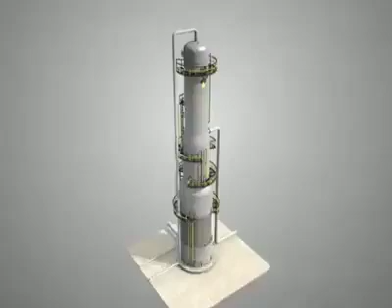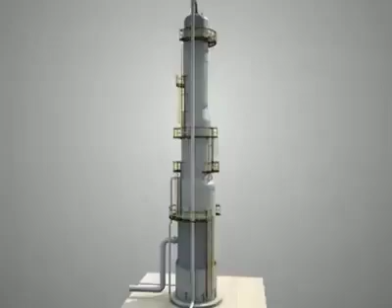In distillation, difference in volatilities is used in the separation of two or more components from their miscible mixtures. The term relative volatility is worked out from experiments and available as vapor-liquid equilibrium data. Higher the relative volatility, easier will be the separation of two components from their mixture using the distillation process, and vice versa.

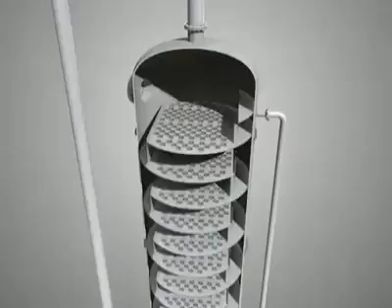Fluid nature, operational requirements, economics, etc. affect the selection of type of distillation column internals, namely packing or trays. These internals are provided to ensure proper contact of uprising vapors and downflowing liquids.

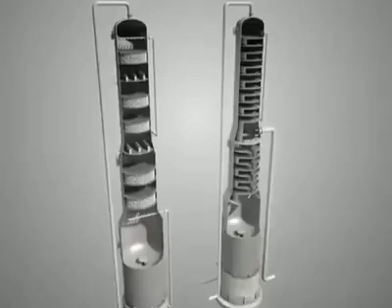The overall distillation system contains various components like feed preheater, distillation column, condenser, reboiler, etc. Knowledge of the complete distillation system along with column internals is required to design and operate it more efficiently. Distillation is a process for the separation of two or more components of desired composition from their miscible liquid mixtures.

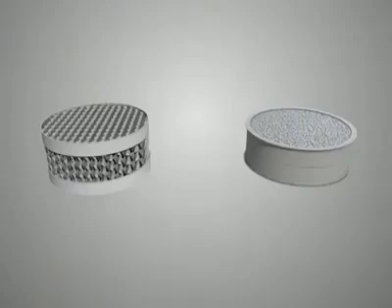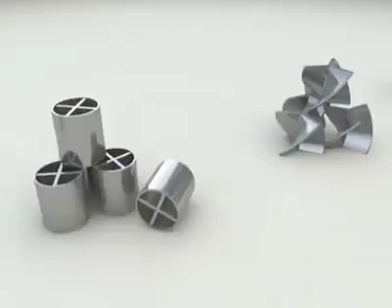Like every separation technique which uses the difference in properties of two components, e.g. density difference used in liquid-solid separation from their slurry by gravity settling method, difference in volatility of two components is used for their separation using the distillation method.

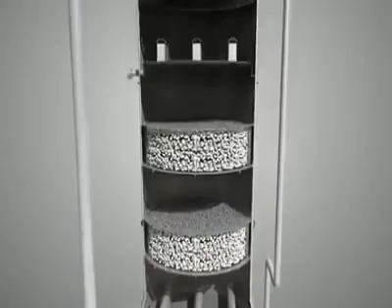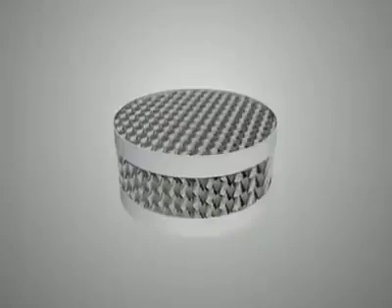Though vapors generated are enriched with high volatile components, trays are relatively complex distillation internals from a design and hydraulic standpoint, which consist of a tray deck, downcomer, and outlet weir.

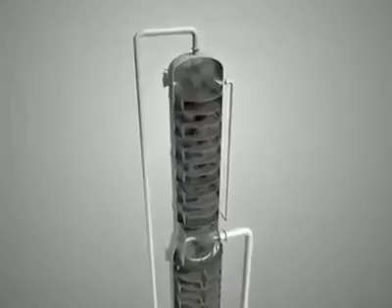In the operation of a typical cross-flow tray, liquid enters the tray at one side and flows across the tray toward a downcomer at the opposite side of the tray (Bruckert, 1968). As the liquid flows across the tray, vapor passing through the perforations in the tray surface forms a froth on the tray surface, which allows mass transfer to take place.

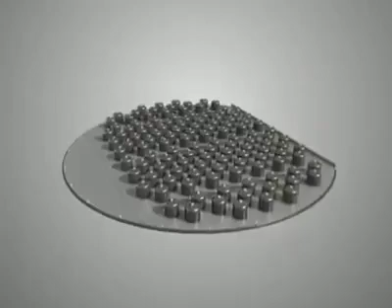At the outlet from the tray, the froth spills over a weir subtending the tray into the downcomer. The downcomer is a device for transferring the liquid phase downward to the next successive tray, but is sealed by such liquid against the vapor passage upward.

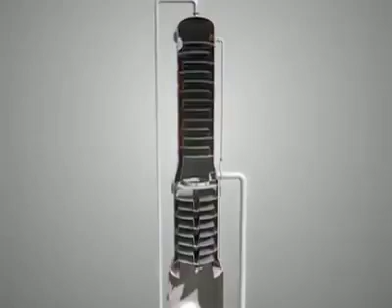In the downcomer, the vapor separates from the froth, leaving a pool of disengaged liquid in the downcomer below the level of the active tray surface. The disengaged liquid enters the next tray under the force of its hydrostatic head, independently of the forces that create the froth and move the froth across the tray.

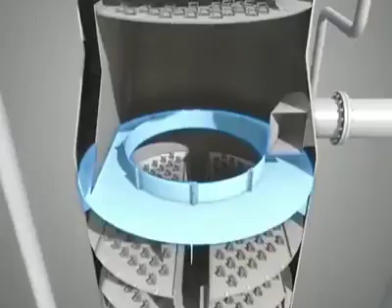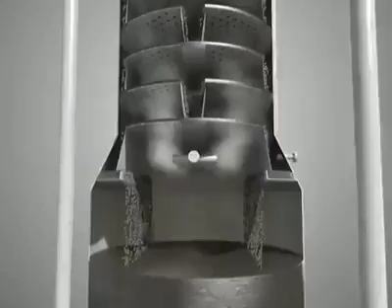The tray decks commonly used in refinery and petrochemical plants can be divided into three types: sieve, valve, and bubble cap. Bubble cap trays, which were patented by Cellier Blumenthal in 1815, were the most popular type of trays before the 1960s, when they were replaced with new designs of sieve and valve trays that matched the performance of bubble cap trays but were much cheaper to install.

(Kister, 1992). Currently, bubble cap trays are used only for special applications. Sieve trays, which are perforated thin plates, are very good in fouling applications or when there are solids present because they are easy to clean.

However, the turndown, the performance when operating below the designed flow rate, is relatively poor (Wankat, 2012). Valve trays are designed to have better turndown properties than sieve trays. Therefore, they are more flexible when the feed rate varies.

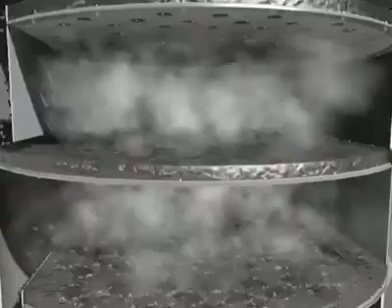Although tray columns provide stepwise contact between the vapor and liquid phases, packed columns provide continuous contact without full disengagement of the vapor and liquid between the top and bottom of the packed bed (Pilling and Holden, 2009). In a packed column, the liquid driven by gravity flows down the mass transfer zone comprising the random and/or structured packings.

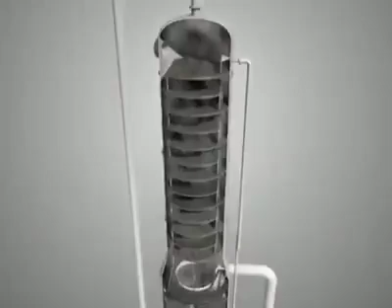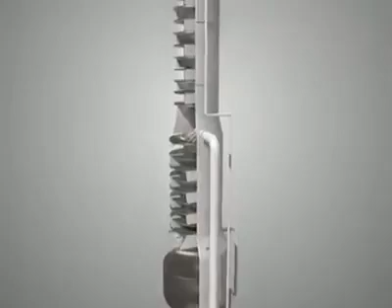The liquid flows in the form of a trickle film or falling droplets, while the vapor as the continuous phase flows upwards from the bottom to the top of the column (Mackowiak and Mackowiak, 2014). Packings are generally divided into random and structured packings, which can be made from different materials, such as metal, plastic, and ceramics.

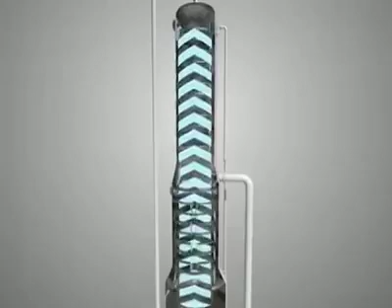(Spiegel and Duss, 2014). The main advantage of structured packings is their relatively low pressure drop per theoretical plate or equilibrium stage, which makes them the most effective vapor-liquid contactor for low pressure, mainly vacuum, applications.

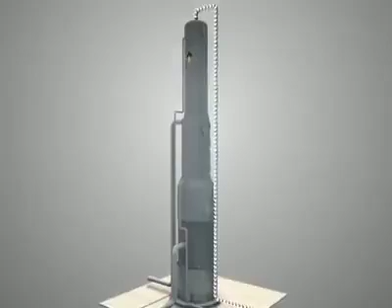(Olujić, 2014). Packing with a pressure drop that is about 1/5 that of the trays (Lockett, 1986) is often the preferred choice in cases where pressure drop is the overriding consideration, such as vacuum distillation or where vapor recompression, heat pumping, is used.

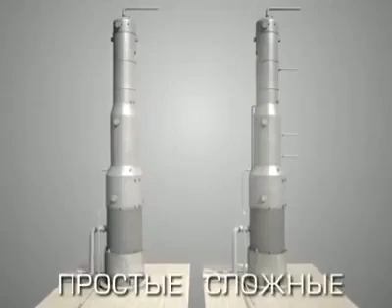The two features that should be maximized in packed beds are the open area, which is the average percent of the cross-sectional area of the column not blocked by the packing, and hence available for the flow of vapor and liquid, and...